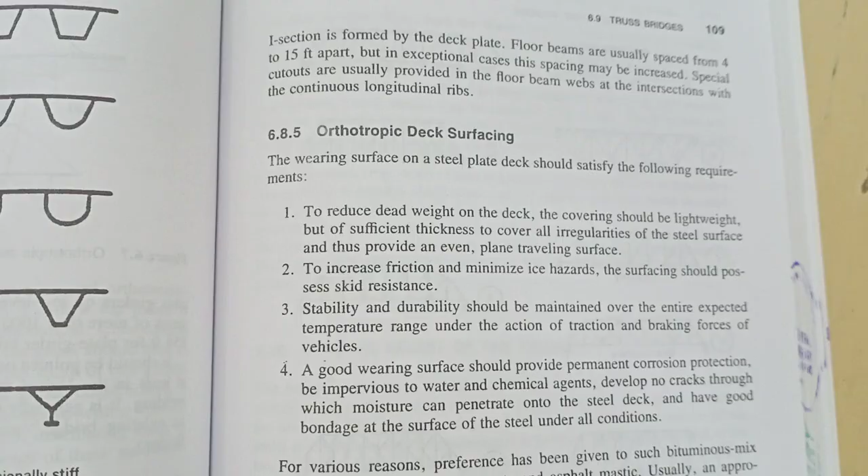Hello guys, welcome to our new lecture on orthotropic deck surfacing and truss bridges. In this video we are going to cover these two topics. So let's start. Our first topic is orthotropic deck surfacing, topic number 6.8.5.

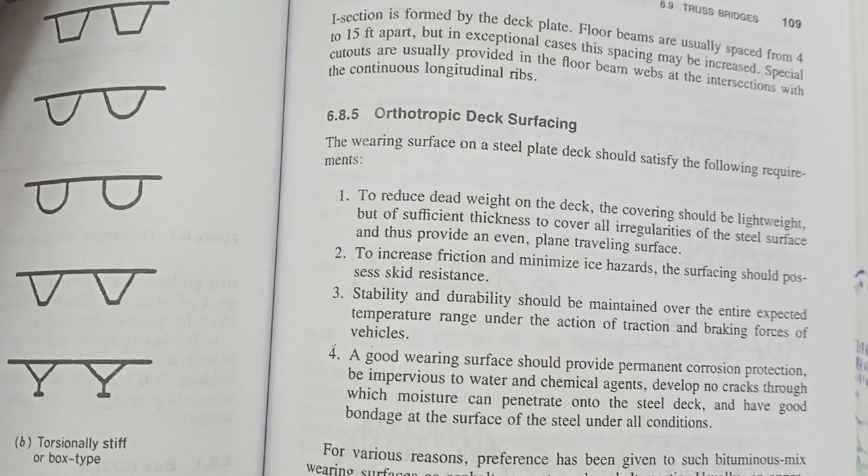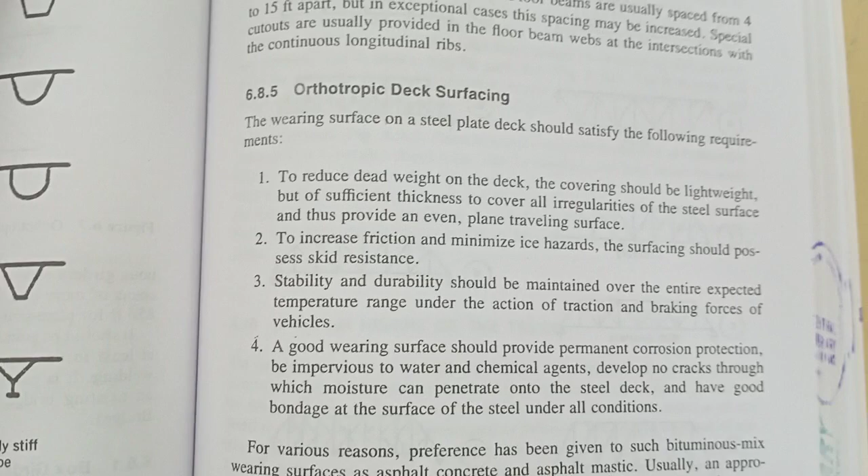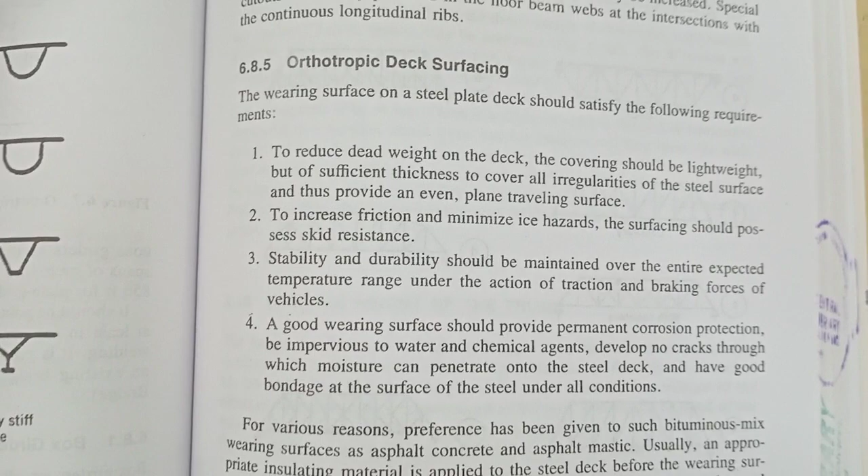The wearing surface on a steel plate deck should satisfy the following requirements. Number 1: to reduce dead weight on the deck, the covering should be lightweight but of sufficient thickness to cover all irregularities of the steel surface and thus provide an even plane traveling surface. So this is point number 1.

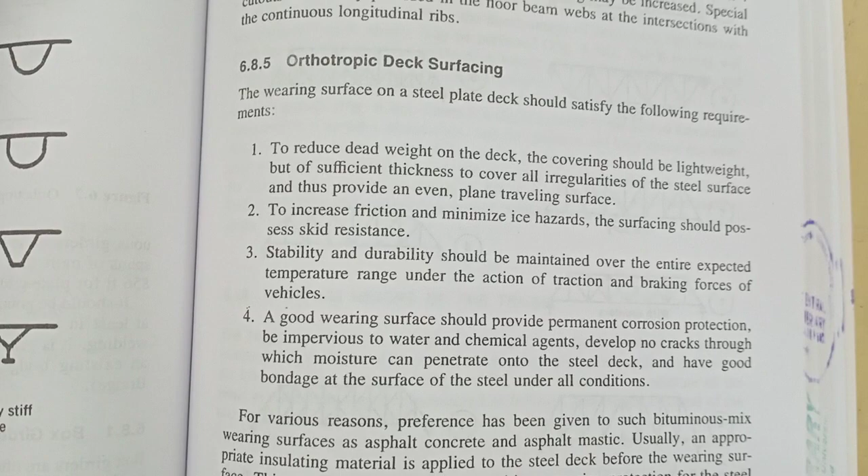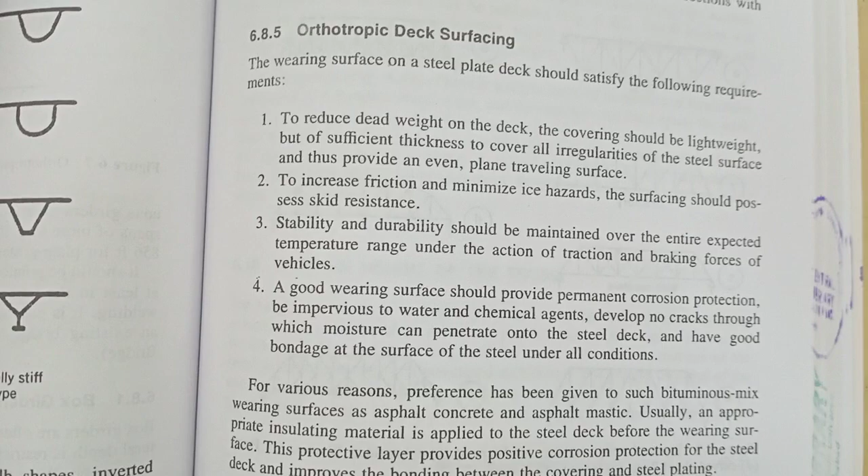Number 2 is to increase friction and minimize ice hazards. The surfacing should possess skid resistance. Stability and durability should be maintained over the entire expected temperature range under the action of the traction and braking forces of the vehicle. This is point number 3.

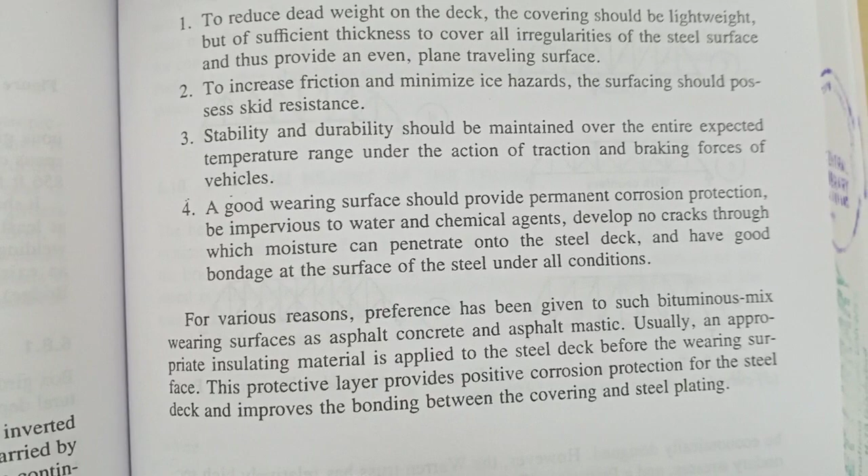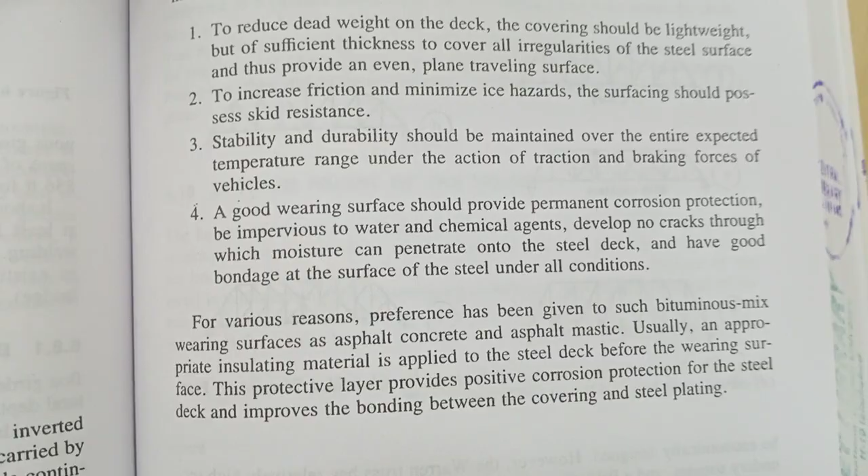And number 4: a good wearing surface should provide permanent corrosion protection, be impervious to water and chemical agents, develop no cracks through which moisture can penetrate onto the steel deck, and have good bonding at the surface of the steel under all conditions.

We have discussed these 4 points about orthotropic deck surfacing, how to cover the deck surface of the bridge. Now this is the conclusion. This paragraph is the conclusion of these 4 points.

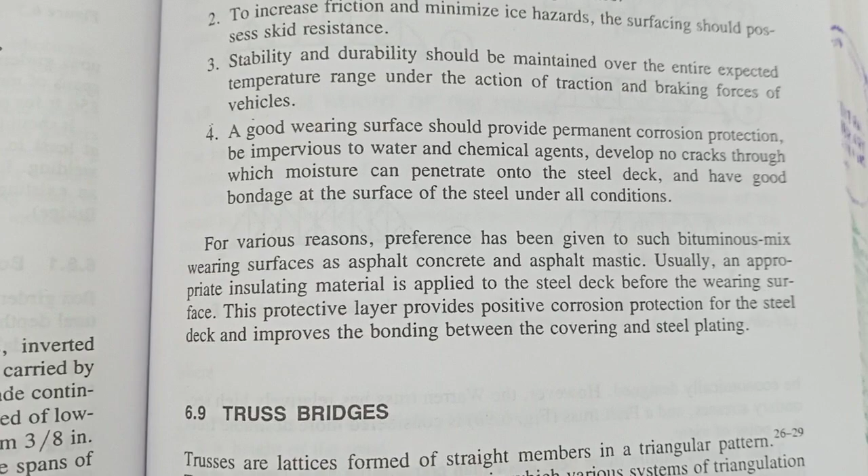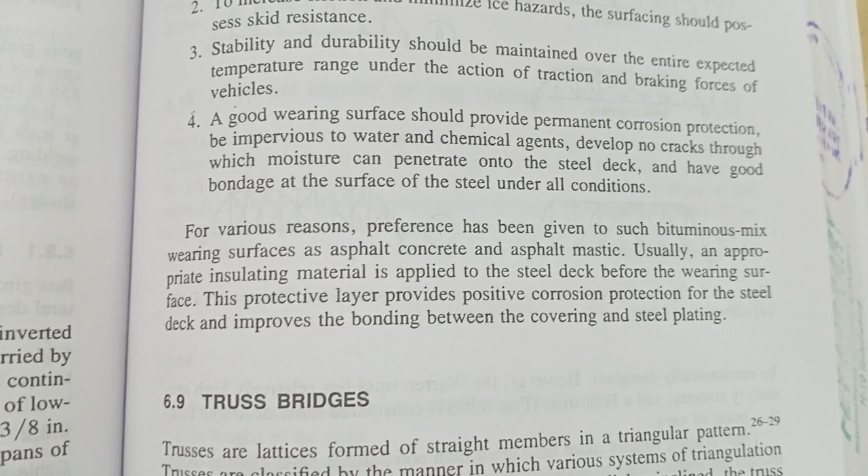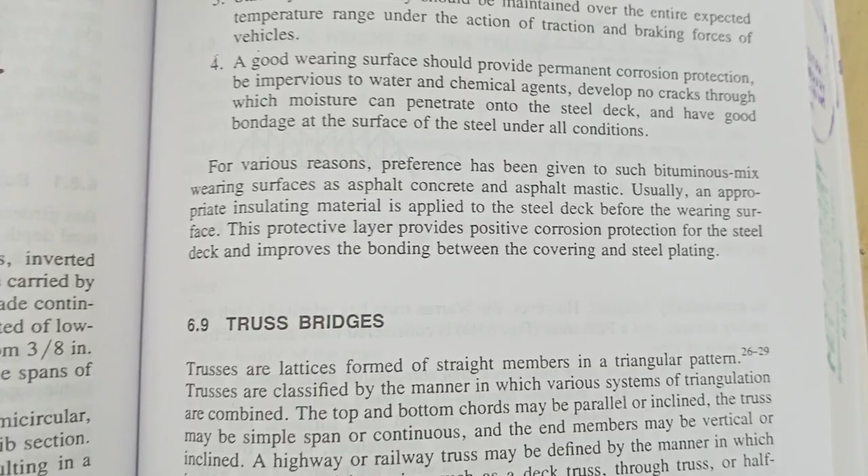For various reasons, preference has been given to such bituminous mix wearing surfaces as asphalt concrete and asphalt mastic. Usually an appropriate insulating material is applied to the steel deck before the wearing surface. This protective layer provides positive corrosion protection for the steel deck and improves the bonding between the covering and steel plating.

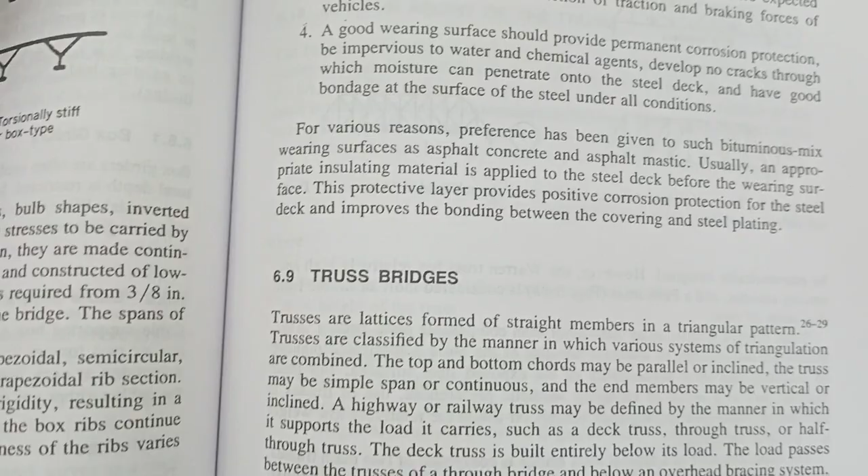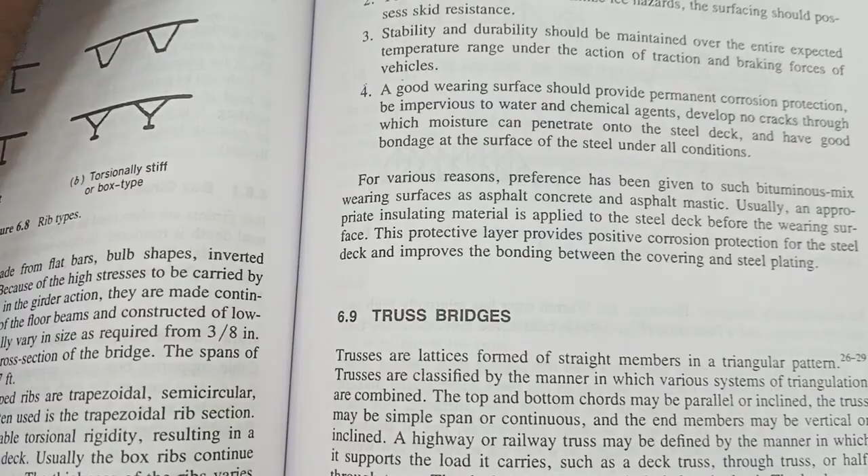So this is our first topic, orthotropic deck surfacing 6.8.5. Our next topic is truss bridges. There are many types of bridges, suspension bridges and other types of bridges. In this video we are going to cover truss bridges.

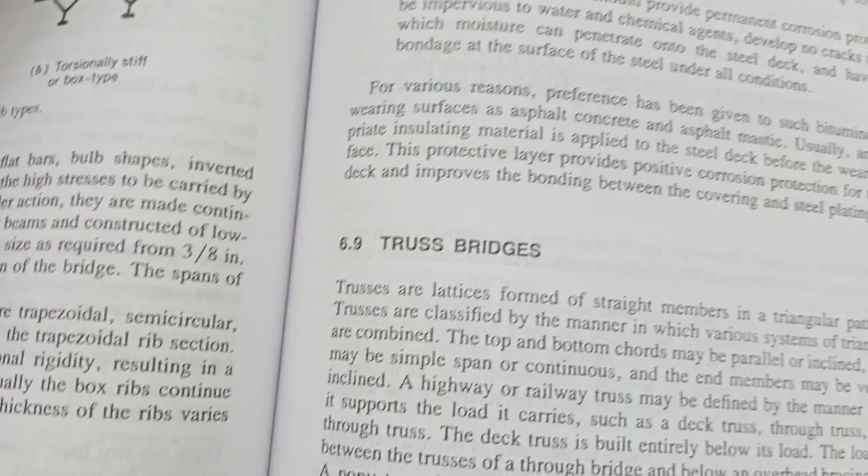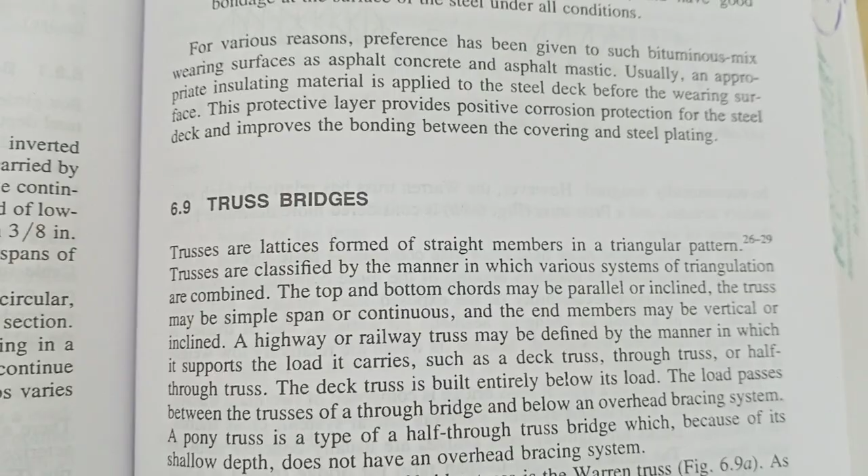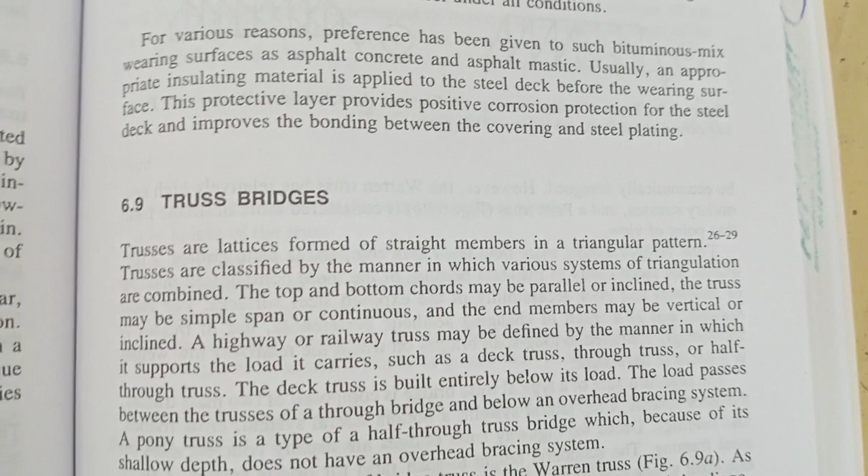Topic number 6.9. Trusses are lattices formed of straight members in a triangular pattern. Trusses are classified by the manner in which various systems of triangulations are combined. The top and bottom chords may be parallel or inclined. The truss may be simple span or continuous, and the end members may be vertical or inclined.

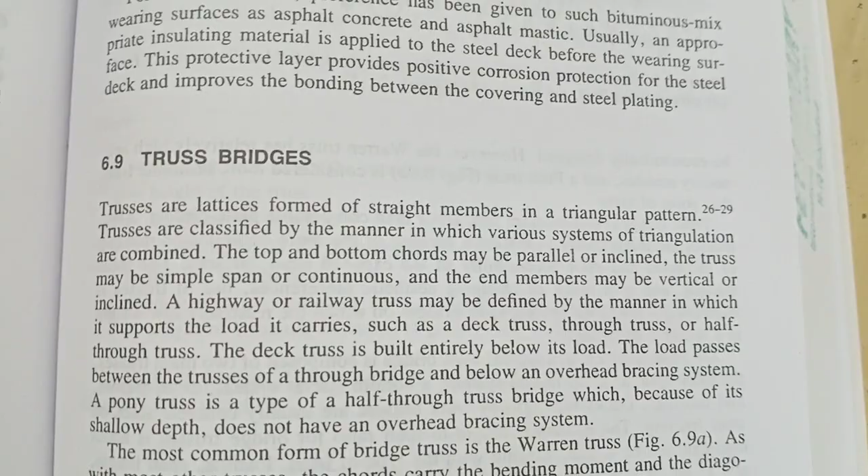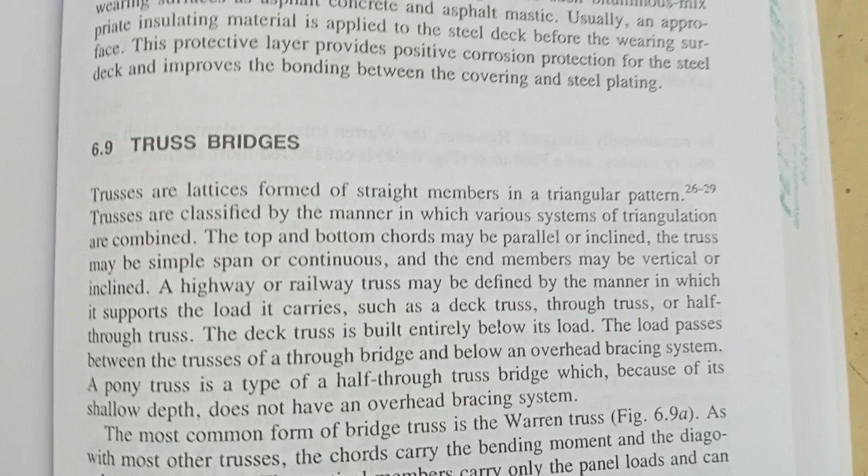A highway or railway truss may be defined by the manner in which it supports the load it carries, such as a deck truss, through truss, or half-through truss.

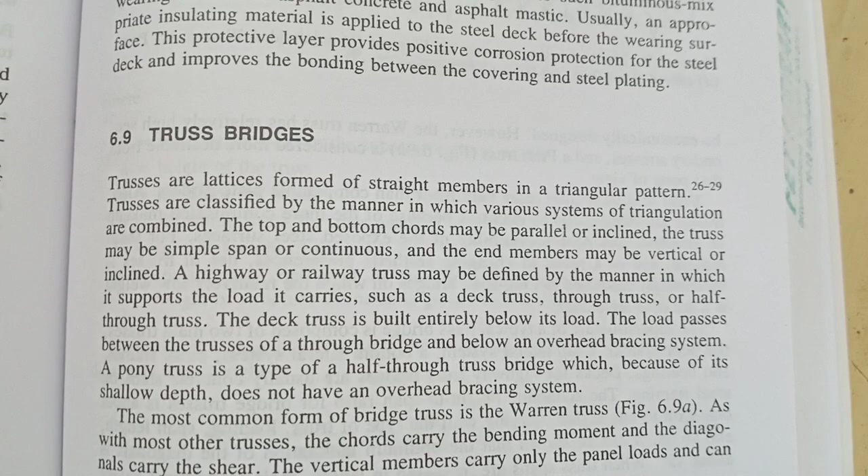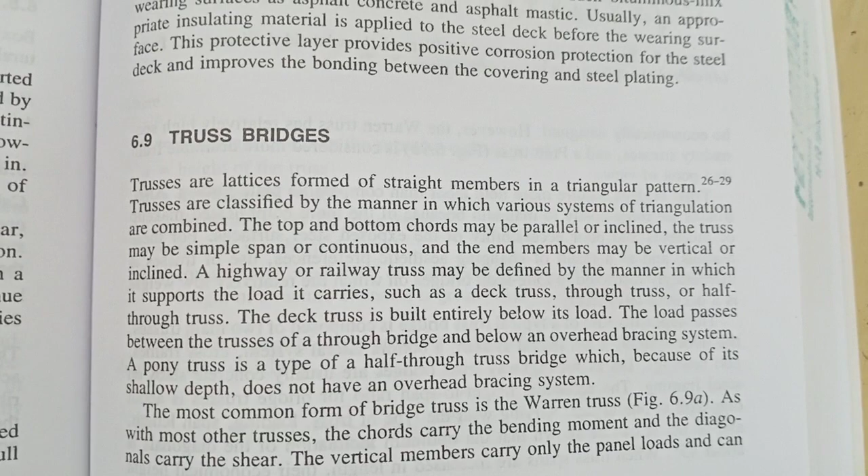The deck truss is built entirely below its load. The load passes between the trusses of a through bridge and below an overhead bracing system. A pony truss is a type of half-through truss bridge which, because of its shallow depth, does not have an overhead bracing system. The most common form of bridge truss is the Warren truss.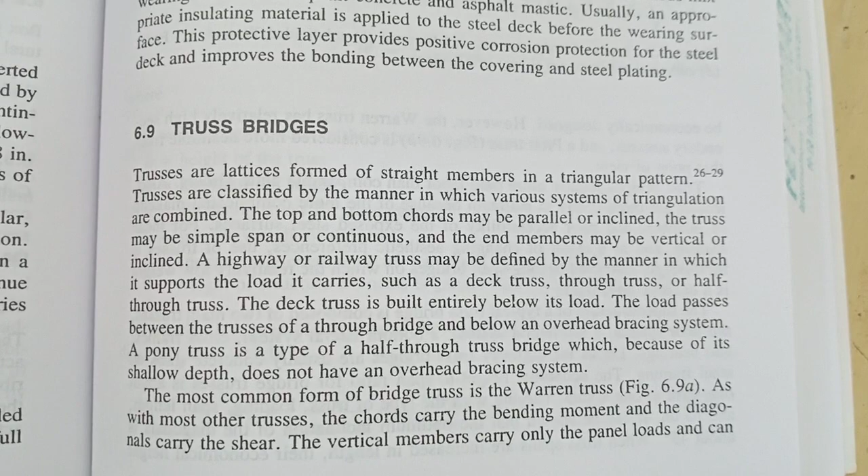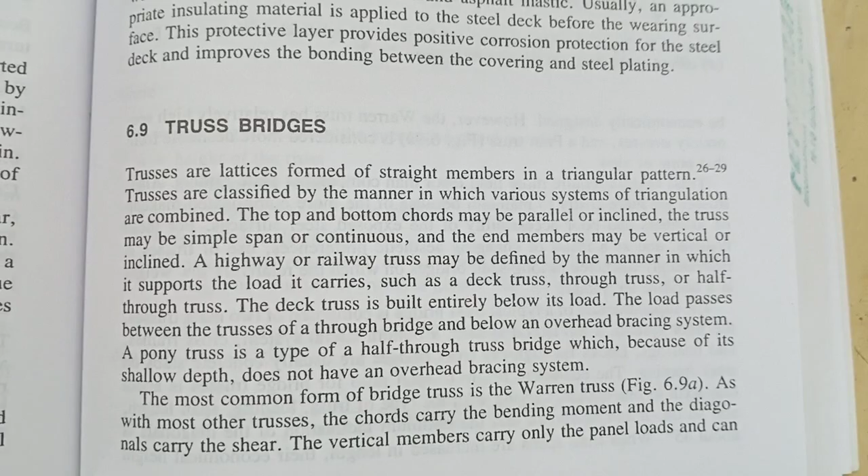Figure 6.9a shows, as with most other trusses, the chords carry the bending moment and the diagonals carry the shear. The vertical members carry only the panel loads.

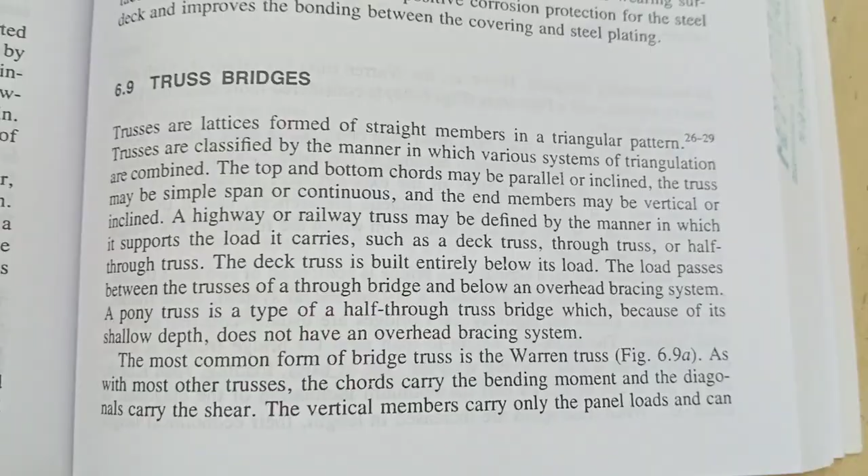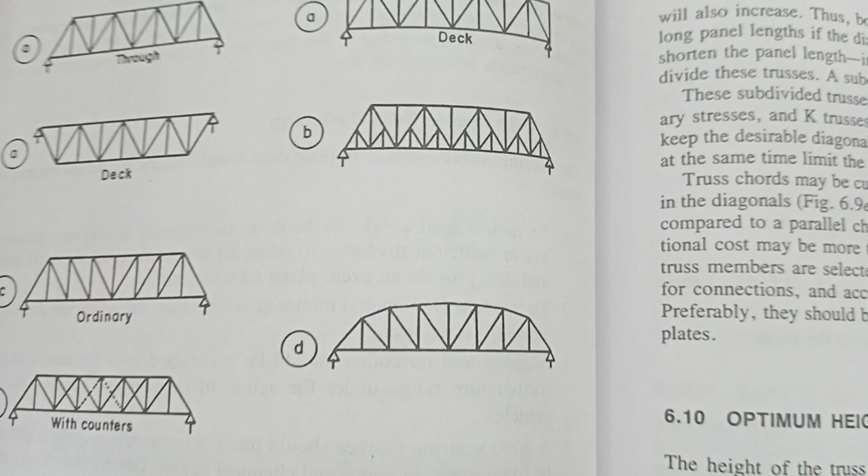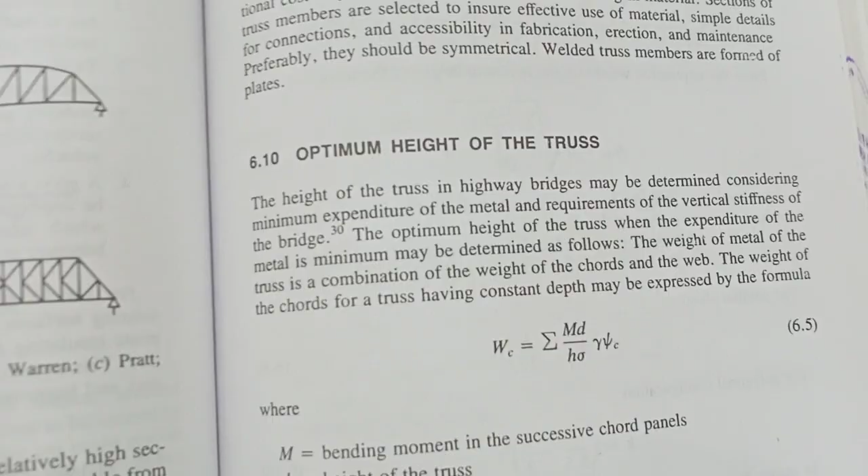These are the truss bridges. You can clearly see the through deck, ordinary with counters, and we can find the optimum height of the truss by this formula, as you can see.